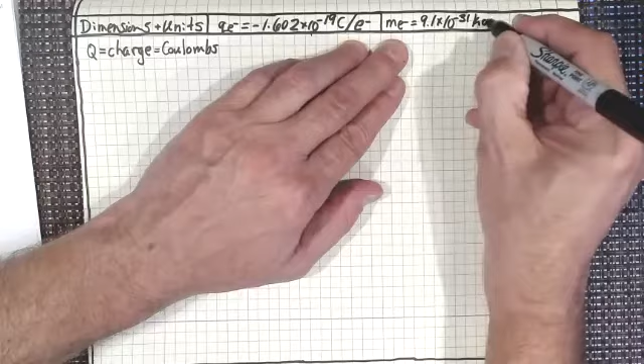Now let's write that up there, because that is something you're going to commit to memory for the rest of your life. You're an electrical engineer, you really should know what the charge on an electron is. In fact, you should probably know the mass of an electron too, since an electron is your life, isn't it? I remember this, and every other electrical engineer you'll ever meet will be able to tell you the mass of an electron. You're not there yet, you're still a couple years away from joining that club, but it is 9.1 times 10 to the minus 31 kilograms. So those two things you really should know.

You should also take away from here the fact that pi is 3.14159, and let's not forget Euler's constant, which I mentioned last time too, is 2.71828.

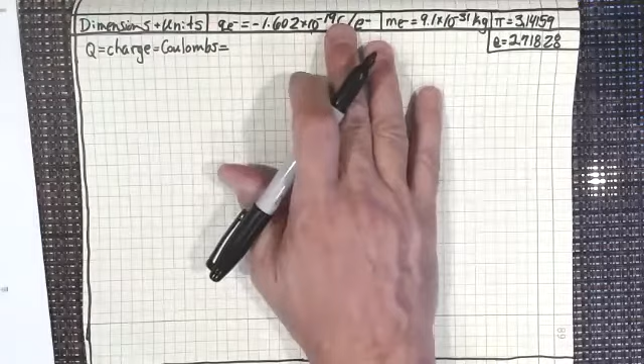So take that away with you, and you're probably way ahead of me guessing what I'm going to ask you to do next. Now let's just look at this for a second. So I know that one electron is -1.602 times 10 to the minus 19 coulombs.

So then the next question is, if I had a bucket of electrons, and inside that bucket was 1 coulomb's worth of electrons, right? We've got a bunch of electrons trying to escape here out of my electron bucket. So I've got a bunch of electrons. How many electrons do I have in that bucket?

Think about it. How would I figure out if I had minus 1.602 times 10 to the minus 19 coulombs per electron, how many electrons would I have in 1 coulomb? I'm sure you're saying, okay, his units there, coulombs per electron, if I just reciprocated that, I'd have electrons per coulomb, right? If I just took the reciprocal of 1.602 times 10 to the minus 19,

I would get 6.24 times 10 to the 18 electrons per coulomb. See how I did that?

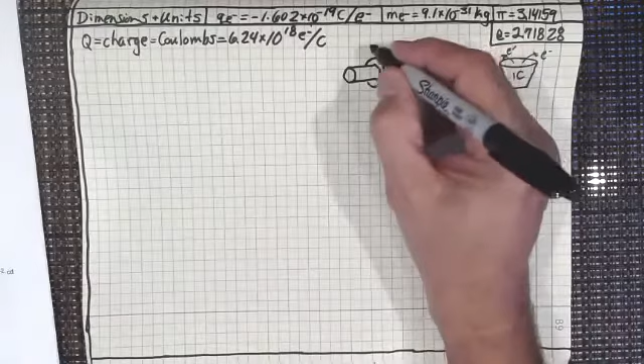So let's say that I've got a piece of wire. It's about 3 inches long. From one end of the wire to the other end, it's going to be 3 inches. This is something that will be counterintuitive to your understanding, but believe me, I'm going to explain it.

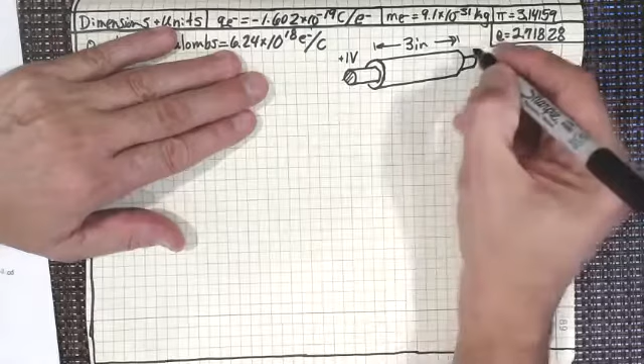Now, remember, we've got this cross section here, and let's say that I have plus 1 volt on one end of that 3-inch wire, and on the other end, I've got 0 volts. Now, let's say that the wire itself, if I was looking at a schematic of the wire, I have a 1 ohm resistor.

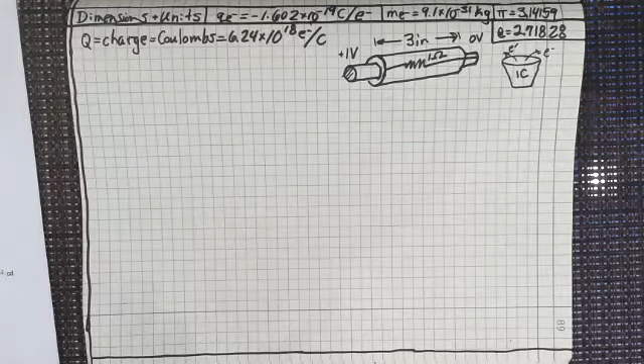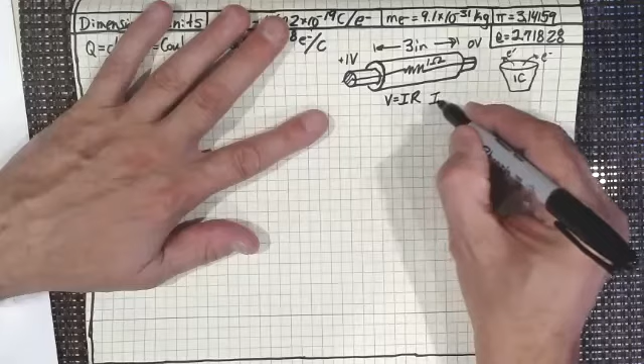Now, with Ohm's law, V equals IR, and some of you may be familiar with that from high school—from Ohm's law, that tells us the current flowing through that wire would be 1 amp, because I would be voltage, 1 volt, divided by R, which is 1 ohm. That gives us 1 amp. So I would have current flowing through that wire.

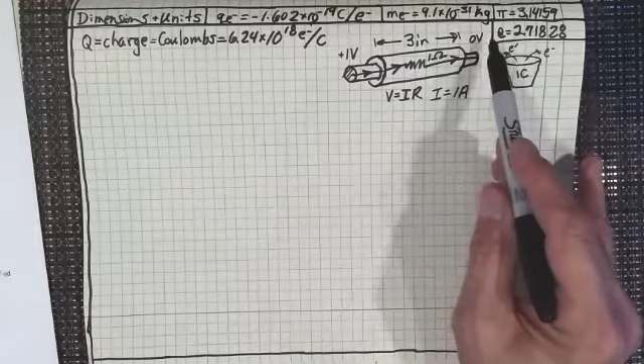And of course, we know that current flows from the positive to the negative. So I'd have current flowing through that wire from the positive to the negative. Of course, electrons go in the opposite direction—I'm just going to point that out to you. So electrons go from negative to positive. So if we were looking at electron flow, it would be flowing in that direction. But the current, I, is flowing in the positive to negative direction. I'm sure everybody understands that. I just thought I'd point out that electron flow, because it's a negative charge carrier, is going in the opposite direction to the current, which we've defined as going from positive to negative.

And of course, we did that because we didn't know—at the time that we defined current, we had no concept of charge and everything else. And of course, charge carriers are electrons, and that's what we've got. So that's quite a bit that we've got there. Now, if that's 1 amp...

Now 1 amp, 1 coulomb. If I have a wire with current flowing through it—let's say 1 amp of current flowing through that wire—and I flow the current through that wire for 1 second, that will transmit 1 coulomb of charge.

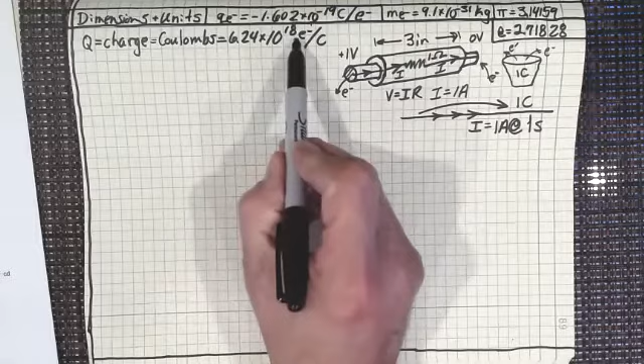1 amp flowing through a wire for 1 second transmits 1 coulomb, or 6.24 times 10 to the 18 electrons. Isn't that incredible? 6.24 times 10 to the 18 electrons transfer through a wire that's got 1 amp for 1 second.

So what we can say, since we know that an amp is current, is that 1 amp equals 1 coulomb per second. That's supposed to be a C—1 coulomb per second. It doesn't look like a C, does it? Let me write it again: 1 coulomb per second equals 1 amp.

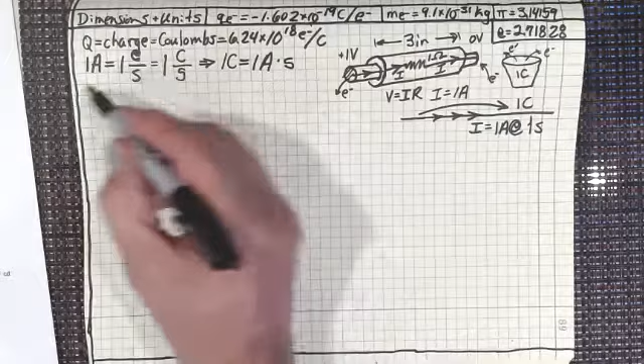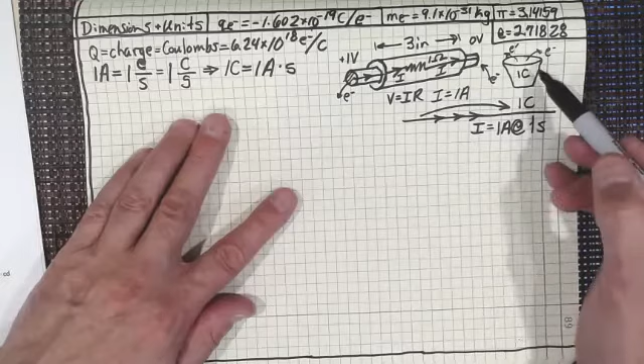Now you could say it's 1 coulomb per second, or we could say 1 coulomb equals 1 amp second—notice I've got the dot there, it's not amp per second. Of course it's not; look at the algebra we've got here. 1 coulomb equals 1 amp second, meaning 1 amp for 1 second gives me 1 coulomb of charge—that gives me 1 bucket, or 6.24 times 10 to the 18 electrons, in 1 second. Does everyone understand that?

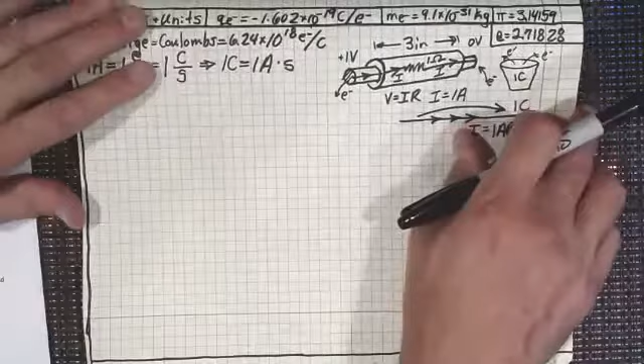Now I want to also point out, what if I set this up and just threw a switch? How long would it take an electron that goes in one end of this 3-inch wire to get to the other end? Let's say I colored the electron going in this end orange. How long does it take to get out the other end of a 3-inch wire?

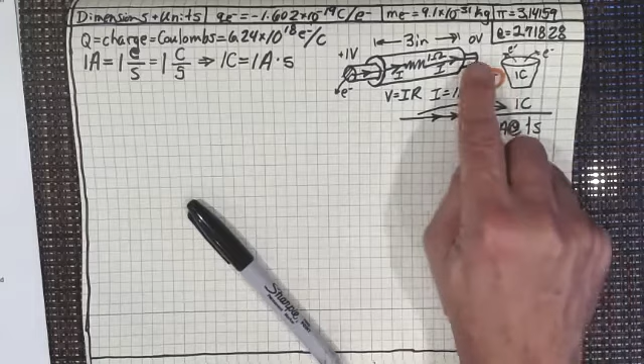You're probably saying, oh, it's got to be the speed of light. No. What this electron does is go into the crystal lattice in the copper. It knocks an electron out of an atom there, and that electron starts going and hits another electron in another atom, knocking an electron out of there, and so on.

Although as soon as I throw the switch, the electronic pressure acts just like your shower. As soon as you turn on your shower, you don't have water from the reservoir immediately come into your house. No, you have water that's been in the piping system for 7 days coming into your house. But as soon as you turn that faucet on, the water pressure pushes that water that's been in the pipes for 7 days out onto your face. I know you're all thinking, oh my God, what have I been doing? That's right, what have you been doing?

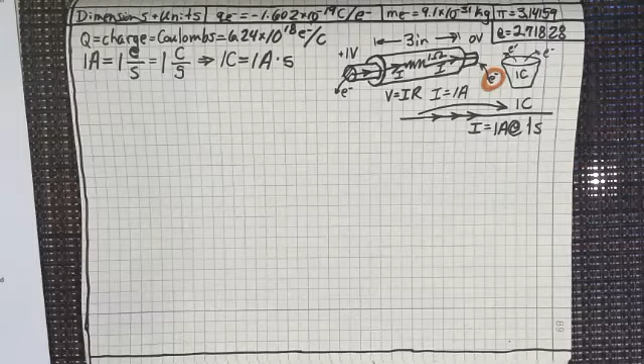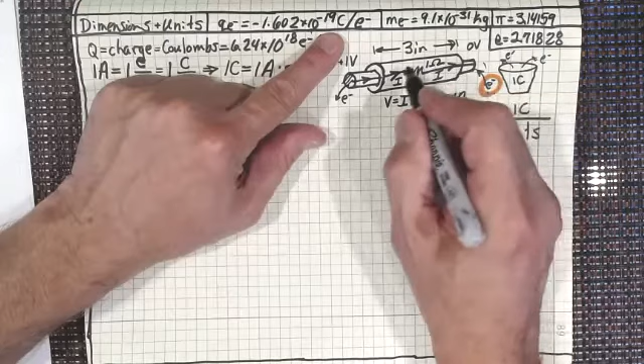But it takes about an hour. It would take about an hour for this particular orange electron that I tagged to knock other electrons free and keep moving down, to actually get out the other end. So I'm just going to put him here. I want you to think about that.

Think about the fact that, just like in the water main system of a city, there's a lot of water already in that system. When you turn the tap on, more water may flow from the water tower into the plumbing system, but the pressure in that system is immediate. In fact, it travels at the speed of sound in water, if you really had to know, but that's pretty much instantaneous for us.

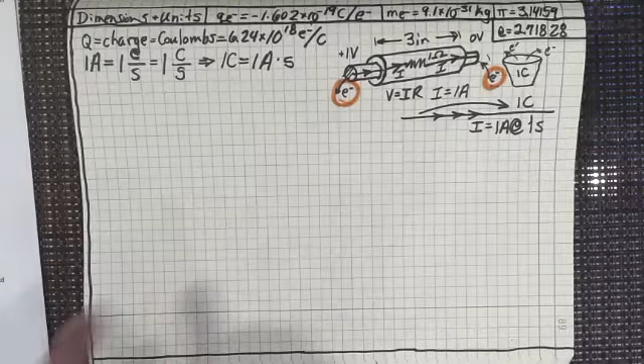The same thing's true here. As soon as I throw that switch, at 7/10 the speed of light I start getting current flowing through here, but that one electron is going to take a long time to actually get through that wire to the other end, because there are already so many electrons on the inside that it has to push out before it gets to the other end. I hope I made that clear. I love trying to make people realize things that are counterintuitive to what they may have learned prior to this.

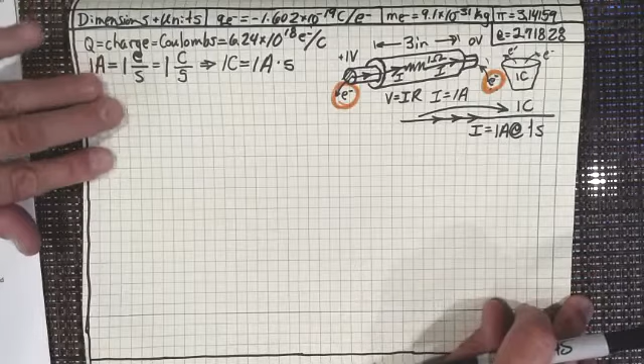Anyway, now that we have charge out of the way and an understanding of electronic charge, let's look at what that gives us in some ways. What is capacitance?

Capacitance is just charge divided by voltage. Charge divided by voltage.

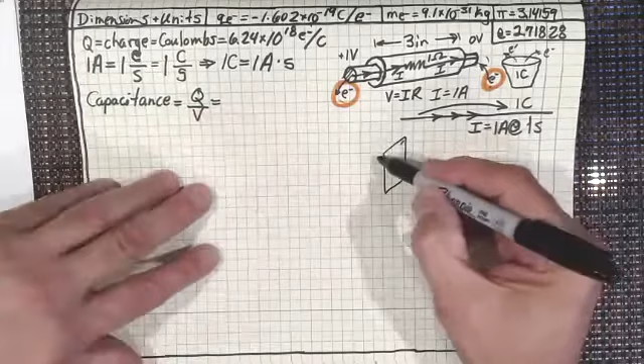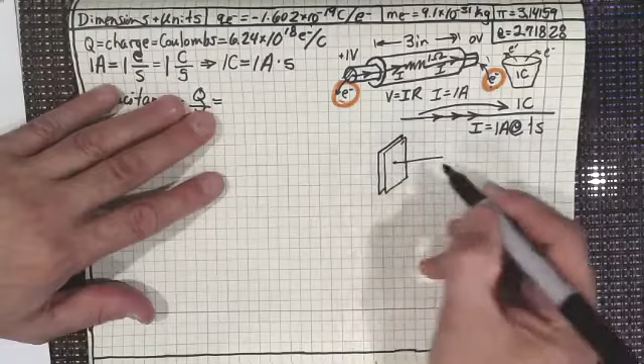I'm just going to draw the capacitor for you, and I want to discuss a capacitor for a second, in general terms. I'm sure some of you have had familiarization with capacitors, maybe in high school or whatever.

Let's say I've got about 100 volts on this side, and we'll call this side ground. How would I hook that up? I'd just run this down to a 100-volt battery, and then run that over to ground, and everything here to here is really just a short circuit. So I've got this set up like that.

Now, what's in the middle? Right now, I'm saying this plate over here is 0 volts. Well, that doesn't come through too well—this plate over here is 0 volts, and then the plate on the other side is 100 volts.

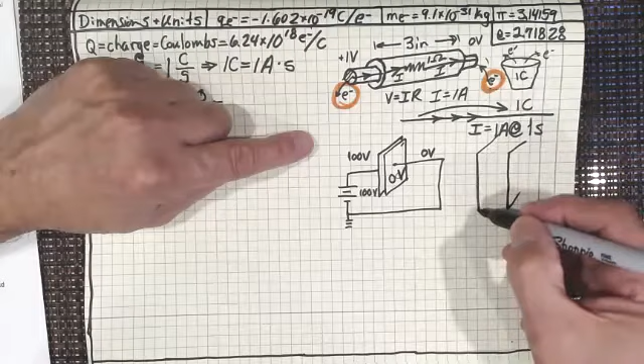So let's just blow that up in two dimensions to see what I've actually got there. It's going off this way, and that's going off this way. But what's in the middle of that? It's an insulator. Don't ever think that there is one electron going from one side of that capacitor plate to the other.

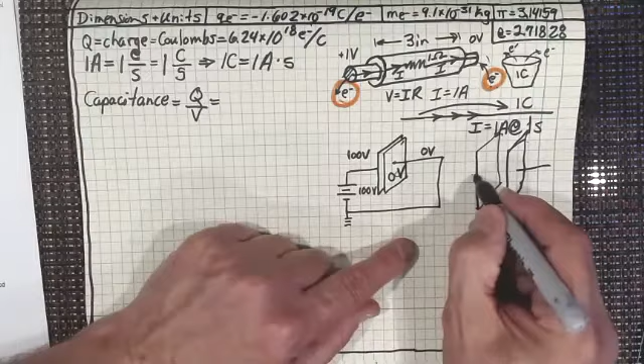So this is a charged plate, and this has a charged plate over here. They both have a charge, equal and opposite charges on both sides of those two plates, just like I've drawn. But what's in the middle of those two plates? They never touch. In a capacitor, the plates never touch. I want to point that out.

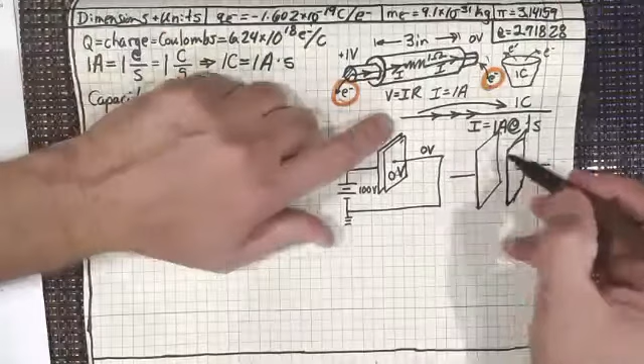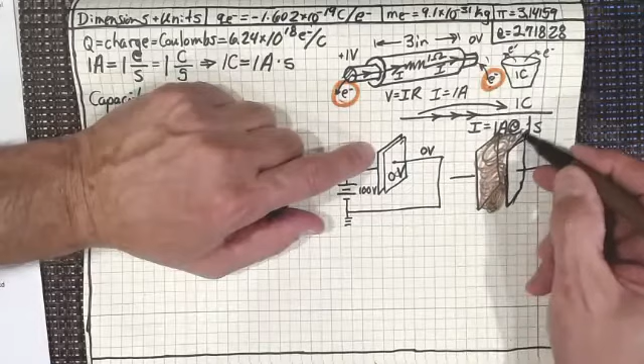I hope this works, because that looks nice—oh no, of course it doesn't, because they all hate me, all of these pens. What do I got here? Oh, that's brown. Oh yeah, we'll use brown. Yep, barium strontium titanate, which is brown, actually. I know that because I ripped these apart.

So I've got barium strontium titanate, which is a fantastic dielectric and is an insulator in the middle of this capacitor now, and I'm charging the two plates. Now, what happens to the current?

Let's say instead of having this all connected, I actually have a switch that I put in here, and I can throw that switch. Now, the capacitor is uncharged to begin with, so I don't have any positive charges here, any negative charges here. In fact, the dielectric itself is unpolarized, and that's what happens to the dielectric inside.

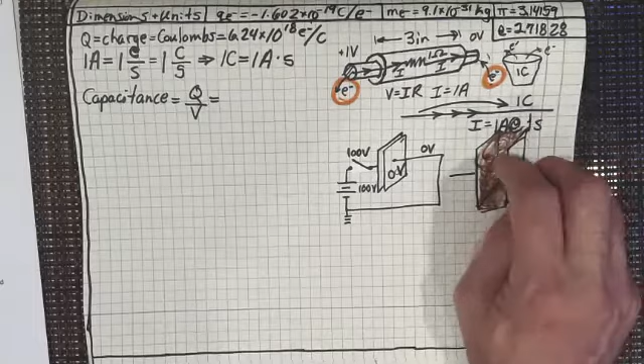It starts to get polarized, where its negative charges go to one side and its positive charges go to the other side. So when I throw that switch, I'm going to put a plus on here just to let everybody know that that's positive. Now, what attracts to the positive?

Isn't it the negative? Once I throw that switch—in the beginning it's going to take a little while—but aren't the negative charges going to start to align over here? Isn't that what happens, so that I'm getting more and more negative charges over here?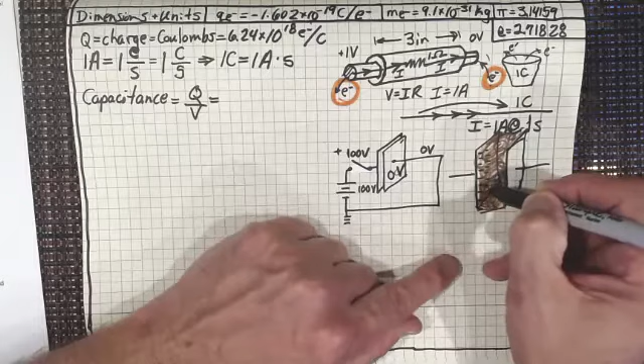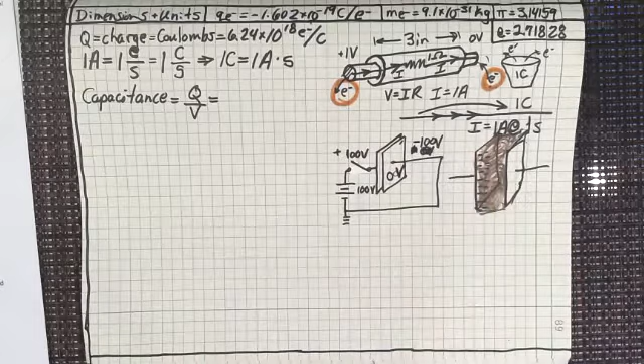Hey, what's going on at the other end? This is the negative over here, so this is my negative. In fact, instead of making that 0, why don't I make it negative 100 volts, so that in your mind it really sticks there. So I've got minus 100 volts on the other side connected to this thing right here.

So I've got minus—and what's that going to attract in the dielectric? That's going to attract a lot of positive charges in the dielectric to line up here. So there's never an electron that ever transfers through a capacitor. Now, the next thing I want to ask is, once I throw this thing, is there going to be current flow?

Oh, you know there is. Oh, yes, absolutely. The charges in here are going to start to move in that direction.

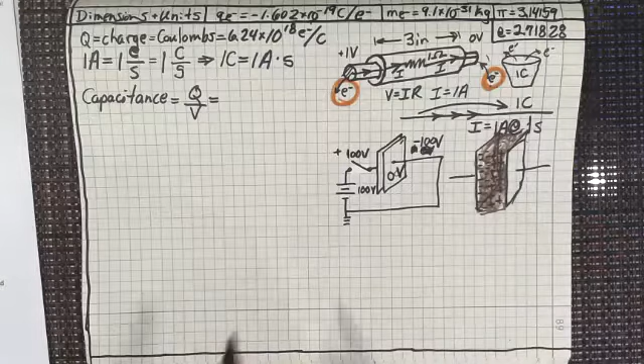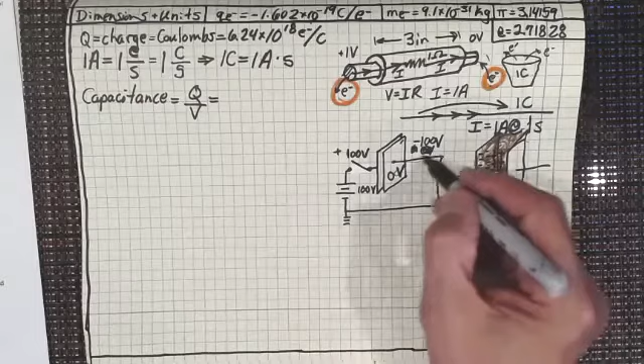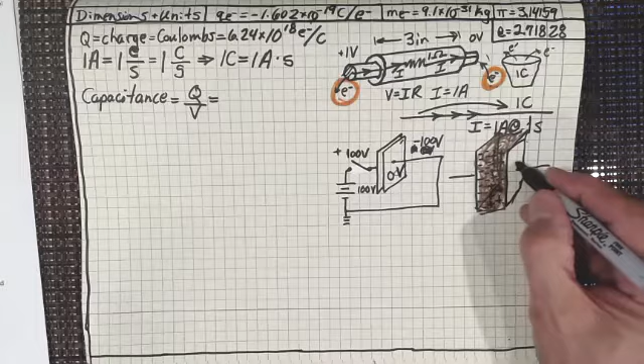So as soon as I throw it, we're going to have these charges lining up, and for them lining up, that's going to change the polarity of the electrons within the wires. So what's going to happen? The electron that's in the wire here—let's make the wire a little bit larger and make it look like a pipe, because isn't it really a pipe for electrons?

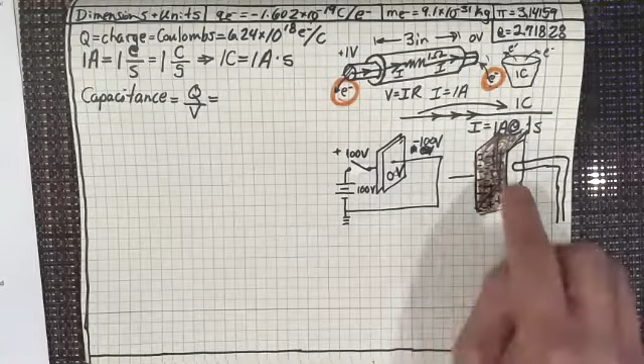So now on the plate here, the plate is going to be positive. And where are the electrons going to go? Aren't the electrons going to be attracted to the positive side of the capacitor? See what I'm trying to do for you here? I'm trying to teach you.

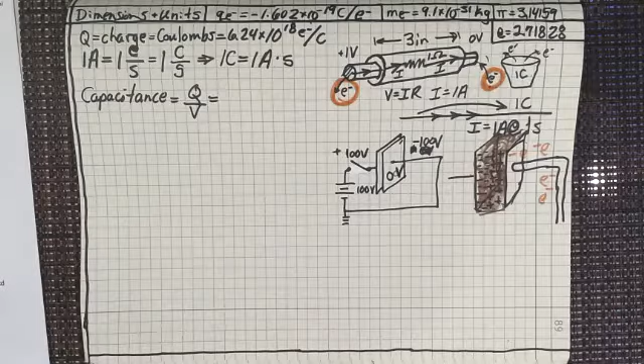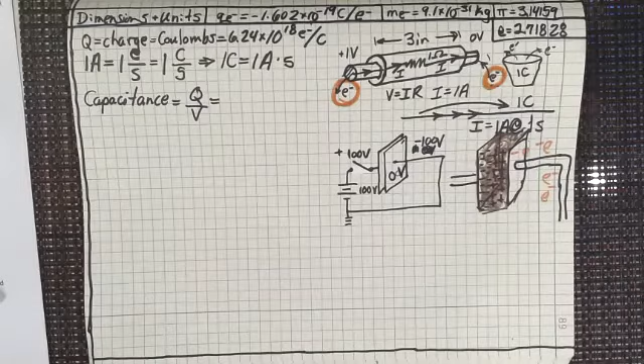Now, how about the electrons in the wire over on this side? I've got another wire over here on the other side. How about the electrons in that wire? Aren't they going to be pushed away from this and start to go in this direction? So we've got electrons flowing away from this negative polarity, and they're flowing in that direction.

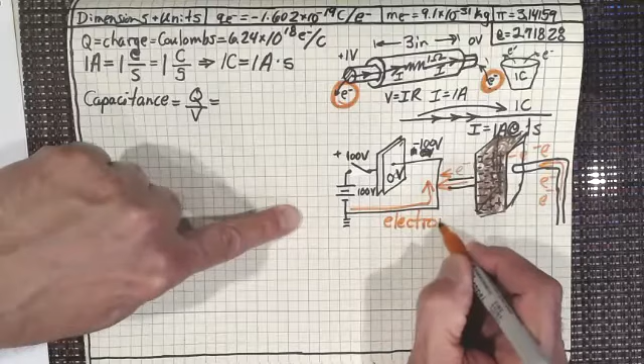So we've got the electrons flowing in this direction, right? That's my electron flow. I hope you're getting all this down. You're getting a fantastic lecture.

Where's my other color that I've got here? Do I have a purple? Oh, the purple never worked, did it? I got a couple browns. Let's see what this color is—it's black. Okay, and then the current is going in this direction, sort of a gray, right?

So my current is going in that direction, and the electrons are going in the opposite direction. So as soon as I throw that switch, even though I've got a capacitor in here, I still get current flow. As soon as I throw that switch, the capacitor acts like it's not even there for the first instant, the first millisecond, the first microsecond. It acts like I've got no capacitor there, and I've got a short-circuited wire right across that capacitor.

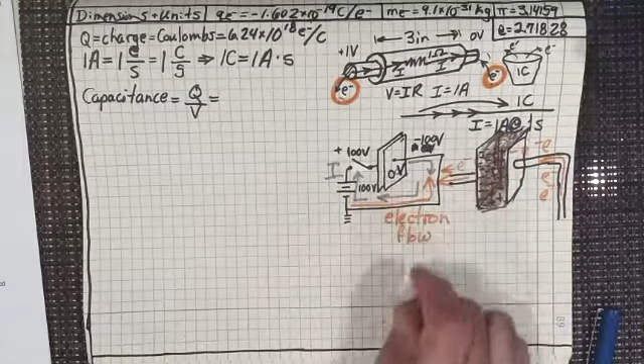I thought I'd just throw that in. We're getting a little off track. Let's get back to capacitance. So, charge: we know that charge is a coulomb, and that's an amp second. And what's voltage? We know that voltage is a kilogram meter squared per second cubed amp, right?

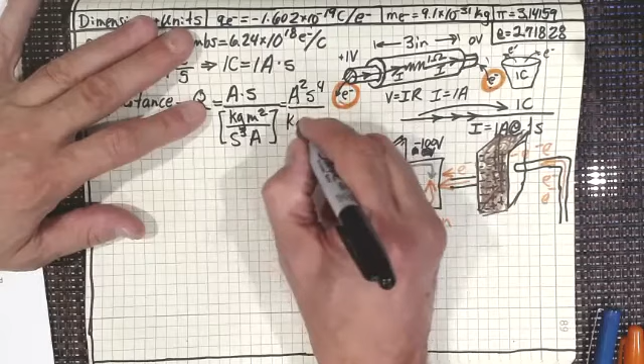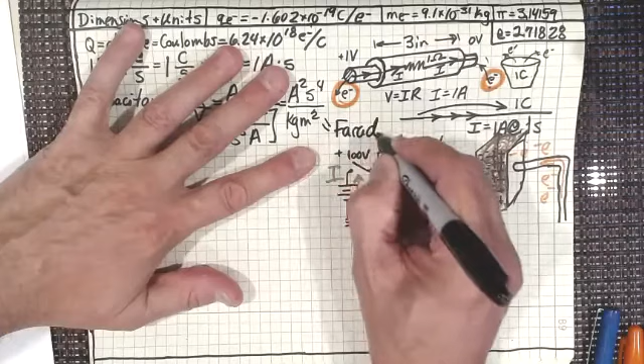Well, let's just simplify that in our heads, because you're engineering students and sophomores, and you know what you can do. You know that we've already taken the numerator times the reciprocal of the denominator, so we get amp squared seconds to the fourth over kilogram meter squared. And what do we call that? We call that a farad, after Michael Faraday, the great British scientist and experimenter.

And so that's capacitance. Just a second.

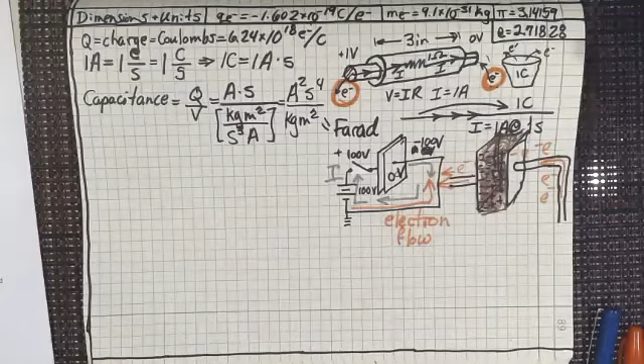Where is that? I thought somebody was at my front door, but I guess not.

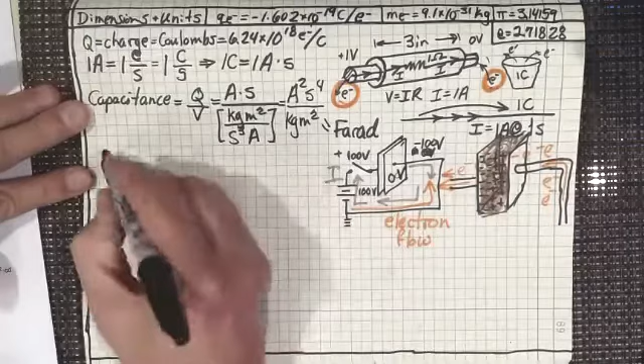Anyway, so that's a farad, and that's capacitance. And so what I want to do next is talk a little bit about magnetic fields. But I also want to catch up on a couple things. Before we do that, let's look at pressure.

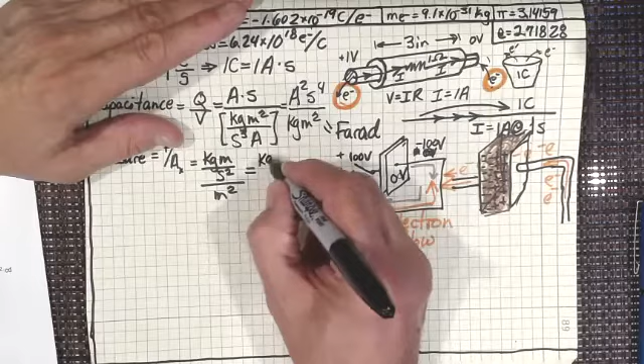You know, pressure, if we define an equation, it's really force per cross-sectional area, isn't it? Force per cross-sectional area. Well, we know that force is a kilogram meter per second squared, and cross-sectional area is meters squared. Sorry about that—I was thinking of the next unit I'm doing while doing this one. Getting a little ahead of myself, so if we multiply the numerator by the reciprocal of the denominator, what we end up getting is a kilogram per meter second squared.

And we actually have a nickname for that unit. It's called the Pascal, and we usually write it as PA for pascals.

Yeah, I've never really seen just the P all by itself. I suppose that would represent something else. I don't know. But we use PA for Pascal. Might as well write it out there.

I actually named my son Pascal, but not the same Pascal. It's actually Paschal, after the patron saint of Paris. And I don't know why that says T. Oh yeah, that's because that was a negative, wasn't it? Okay, so that's a Pascal.

Now, when I say pressure, this could also represent stress, because if we looked at a tensile specimen, a piece of steel or aluminum, and we were pulling on it with a force, let's say 10,000 newtons, and then we look at the cross-sectional area, we can do the same thing. We could say that stress, and we usually use sigma for stress, is equal to the force in that solid piece of steel divided by the cross-sectional area.

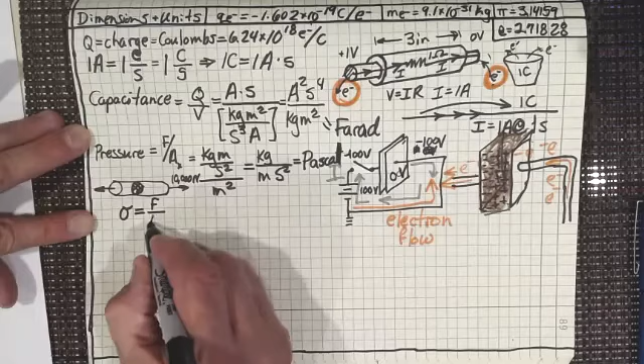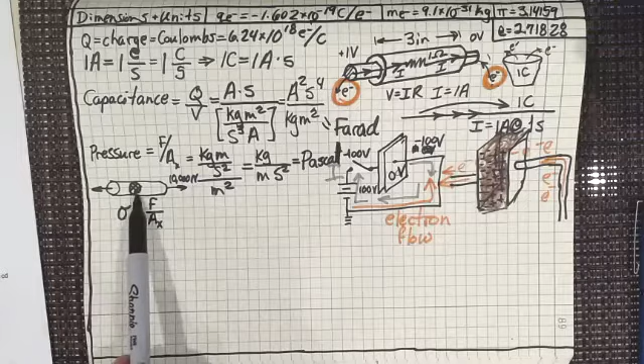When we're looking at pressure, we're usually looking at a fluid or a gas—I should say fluid, because that includes both liquid and gas. So we're looking at a fluid pushing on a cross-sectional area, like the water on the bottom of a dam gateway. Here we're looking at the tensile forces inside a piece of steel. This is more solid mechanics, whereas pressure is more for fluid mechanics, if you know what I mean.

And so we get the same thing here, we get pascals. Now what is a pascal really? A pascal is really energy per volume. And that's why I named my son Pascal, because he's really energy per unit volume. Yes, I know, don't be the son of an engineering professor—there's the moral of that story. Although my son loves his name, and his nickname is Pass, and he's a great soccer player, so that's all good.

All right, so energy then is kilogram meters squared over seconds squared, and then volume is meters cubed. You see what I'm really doing here? I'm just teaching you how to use these. All throughout your life, you're going to be doing this with units and stuff.

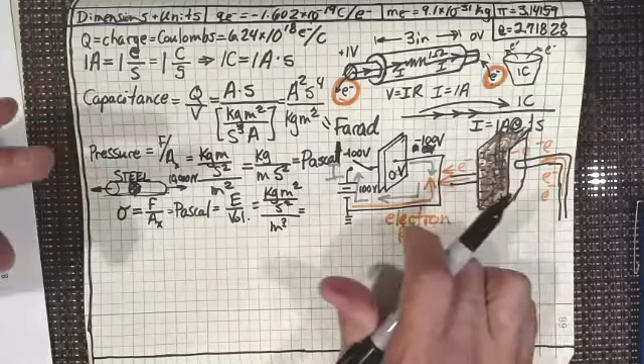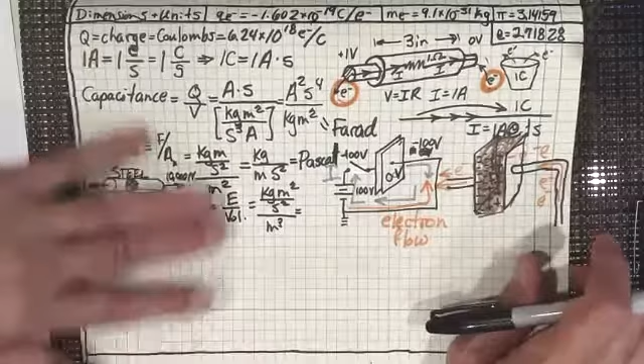You're going, God, I think the heat that's coming out of that cup has to do with the thickness of the cup. And someone's going to say, no, it doesn't matter how thick the ceramic cup is, heat comes out just as fast. You go, no, I think the thickness of the cup is slowing it down—if I make that cup twice as thick, it'll be half as fast. I'm talking about the conversation the people had that actually figured out what heat transfer was all about. So let's go back to this now.

Now this is cubed, and we get the same thing, kilogram per meter second squared. So yes, energy per unit volume is the same as pressure, is the same as stress in solid mechanics, is the same as pressure in fluid mechanics. They're all the same—it's energy per unit volume. All right, so I got that out of the way.

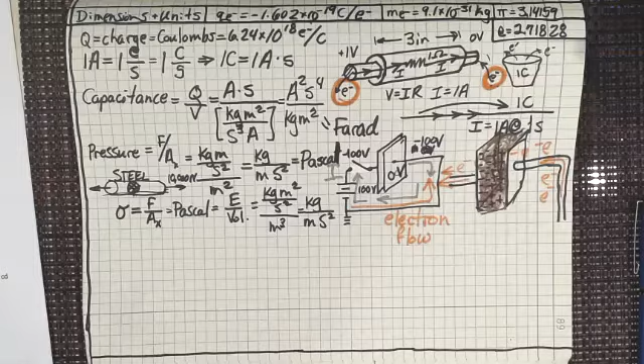The next thing I wanted to look at is flux. Now, before I do that, I just want to look and have a discussion. Why don't I have that discussion of flux in the next one? I'm going to continue presenting these.

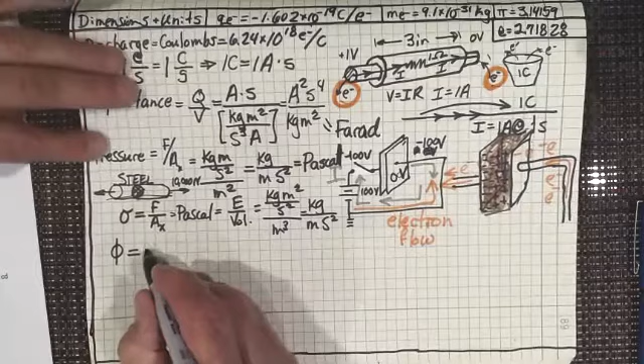So magnetic flux—let's say voltage times time. I just want to get this out, and we'll have a much longer discussion of what magnetic flux is later, but just to talk about the dimension and units of magnetic flux: we've got voltage, which is kilogram meters squared per seconds cubed amps, times time, which is just a second. So that gives us kilogram meters squared over seconds squared amps. Now, what do we call a kilogram meters squared over a second squared amps?

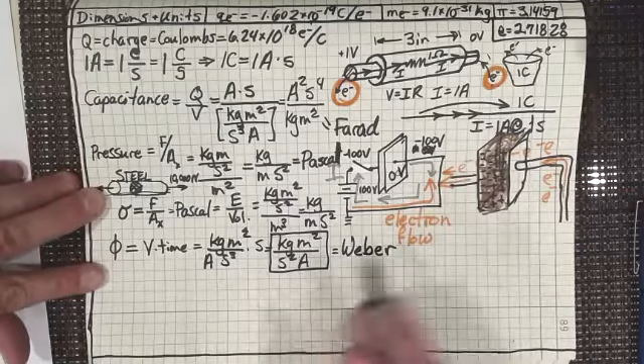We call that a Weber. Yep, it's named after a barbecue grill that we use—no, of course it's not, but that is what we do. And what am I talking about here? I'm talking about magnetic flux.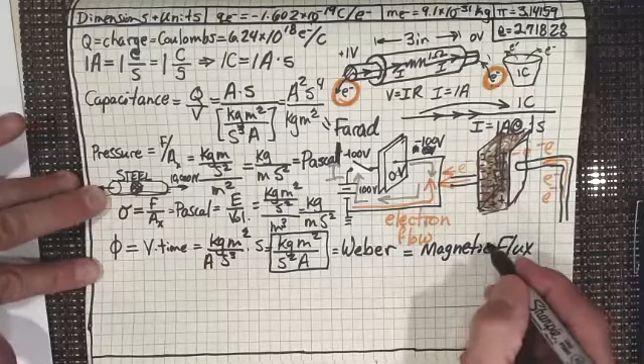We'll have a much more in-depth discussion of magnetic flux about the middle of the lecture series.

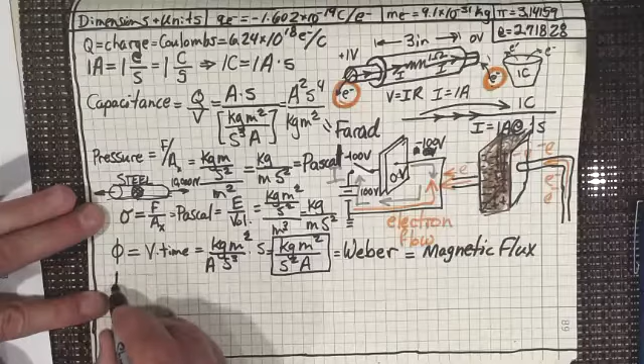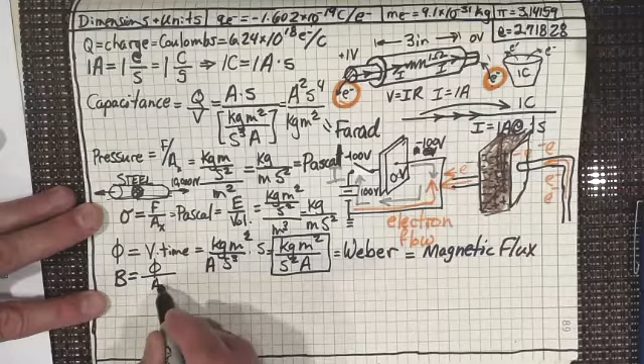Now the next thing I want to look at is something you're more familiar with, and that's magnetic flux density. That's magnetic flux per cross-sectional area. We want to know the amount of magnetic flux that's flowing through things.

Let's say I had a bar magnet right here. This is the south end, and this is the north end. I have flux flowing out of the north end into the south end. I'll put some arrows as to the direction it's going. So we've got flux that's flowing out.

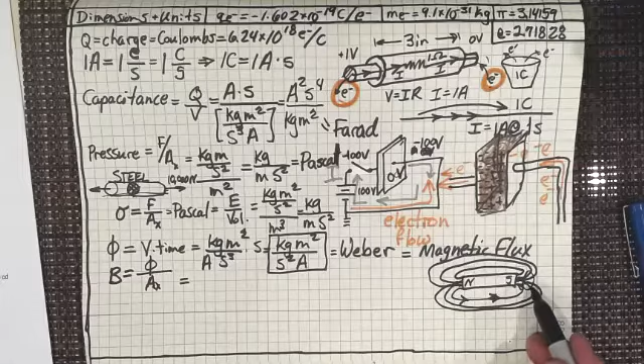I think everybody can see that if I take a cross section right here, I'm going to have a lot more flux lines going through it than if I take the same size cross section out here. So I'd have a lot of flux density here, and a little flux density here.

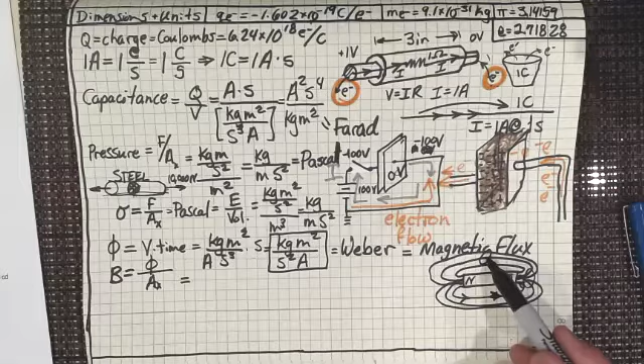And that's what magnetic flux density really tells us. It tells us where the magnetism is really intense, where the magnetic strength is the greatest. And of course it's the greatest right here, not out here in the middle of the flux lines.

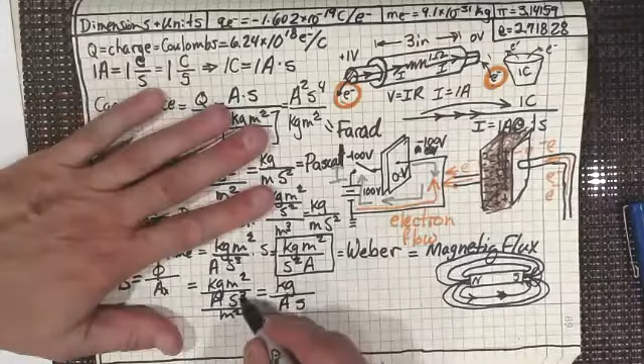So when you look at that, it'd be over the square. This would be kilogram meters squared over amp seconds cubed, divided by meters squared. I think everybody can see that gives you a kilogram per amp seconds squared. Sorry, I meant seconds squared, amp seconds squared. So there we go: kilogram per amp second squared.

And we have a name for that too. In fact, that's something we use even more often, because we talk about the magnetic field at the surface of the Earth, and this would be a Tesla. Now, what is the magnetic field at the surface of the Earth? It's about 50 microtesla.

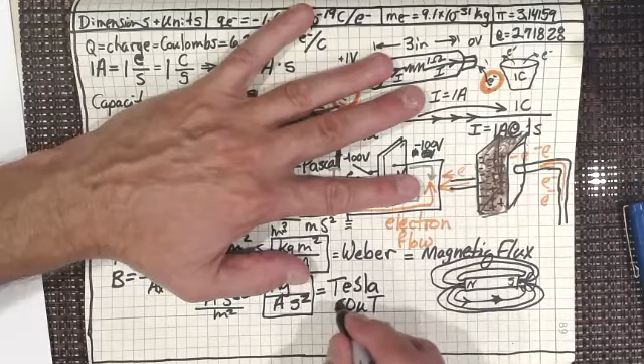That should be a 5. 50 micro... 50 microtesla is the terrestrial magnetic field of the Earth. We talk about the magnetic field of the Earth in flux density terms, not flux terms. I don't know what the overall flux of the entire magnetic field of the Earth is. It's got to be quite substantial, I'm sure somebody at NASA knows the answer, but I don't.

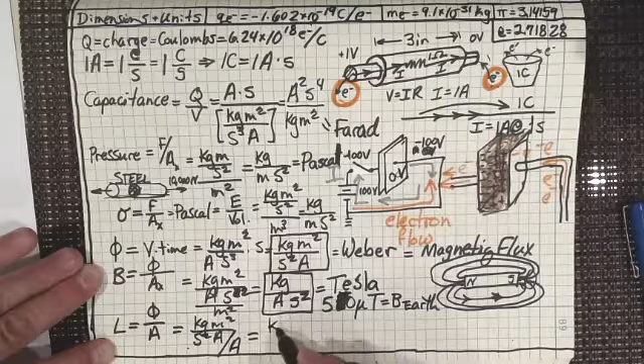The last one I really want to look at is inductance, and inductance is really flux per amp. So if we do the math there: kilogram meters squared over seconds squared amps, and we divide that by an amp, that's going to give us kilogram meters squared over seconds squared amp squared.

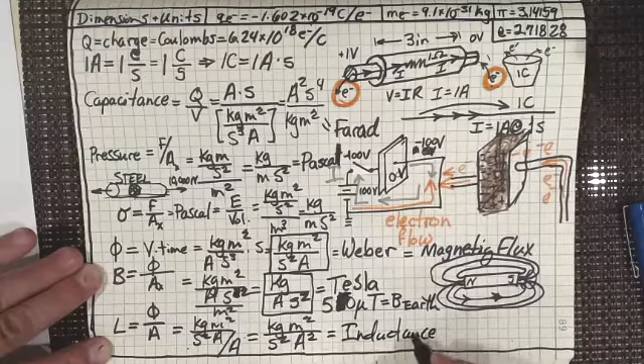And we have a name for that. That's the unit of inductance, or the dimension of inductance. And the unit of inductance, of course, is a Henry.

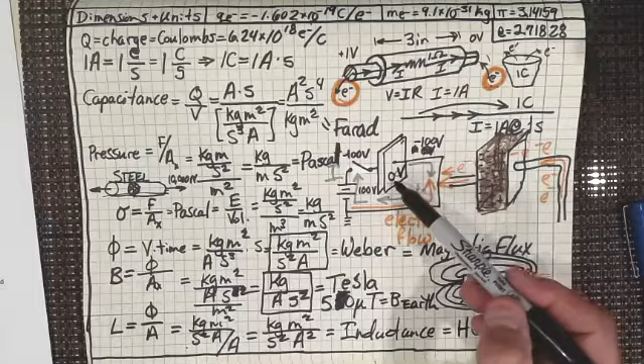Yep, and so that ends the dimensions and units part of the course. I could get into so many other things, and we're going to definitely talk more about capacitors and inductors, how inductors store energy, how capacitors store energy, all of those things throughout the course.

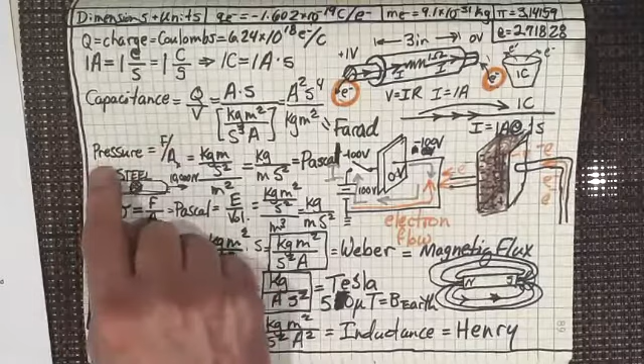But what I wanted to do, in the Network Theory 1 course and in the mechanics course, we're going to be concentrating more on this, the steel and the pressure and all of those things. However, all of this is important for your general understanding of engineering dimensions and units. You'll also be working with engineers from other disciplines, and you'll want to understand pressure too. Don't say 'I don't want to understand pressure because I'm an electrical engineer' - no, you want to understand the units of pressure. All of these things intertwine all the time. So focus on that.

All right, I'm going to end this lecture here now. This is our third and final lecture on dimensions. Then we're going to start getting into the meat of the course.